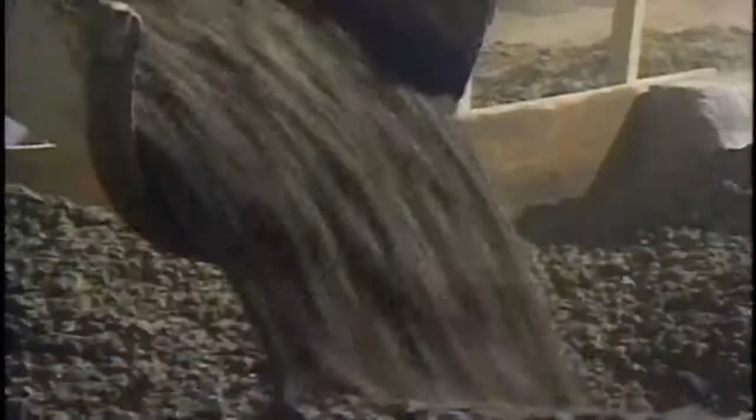Concrete. It's the most used building material on Earth. It was the building block of the Roman Empire. Today, it's the material for a new generation of gravity-defying skyscrapers. The raw ingredients that create this magic formula can be found in nearly every country on Earth.

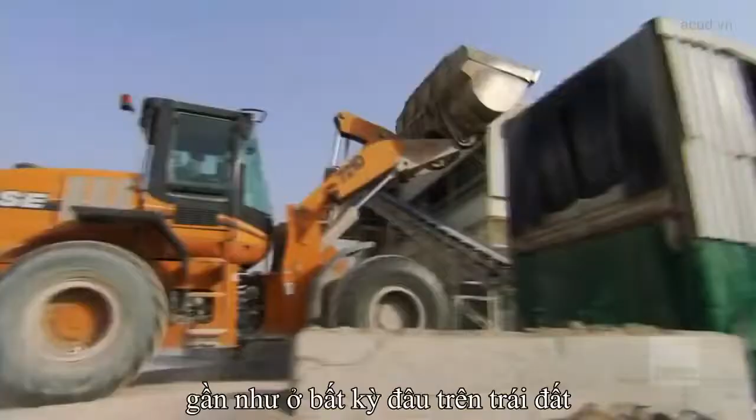Yet how these simple components are mixed together can make the difference between tragedy and triumph. From the mundane to the massive. From the ordinary to the extraordinary. Concrete helped pave the way for innovation and laid the foundation for the world's greatest civilizations. Now, go inside the science of concrete.

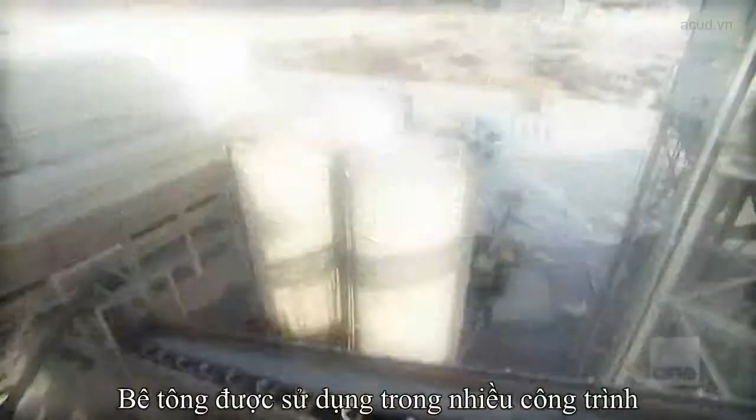It starts out like liquid. When it dries, it becomes stone hard. This amazing metamorphosis has earned concrete the nickname liquid rock. It has served as a cornerstone of engineering for centuries. And it's a highly prized tool of construction for a reason.

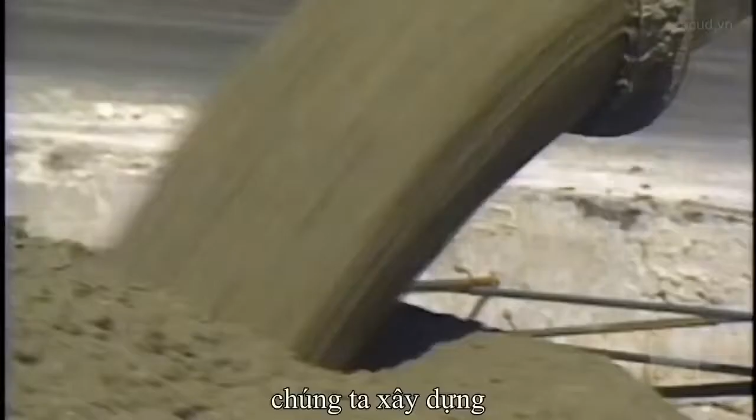It's easy to take concrete for granted. People see it in sidewalks and roads all the time, every day. But in fact, it is the closest thing to a miraculous material in construction that we've ever had. Concrete is everywhere. It has an almost unlimited engineering potential. It can take on nearly any shape and forms the backbone of a variety of the world's construction.

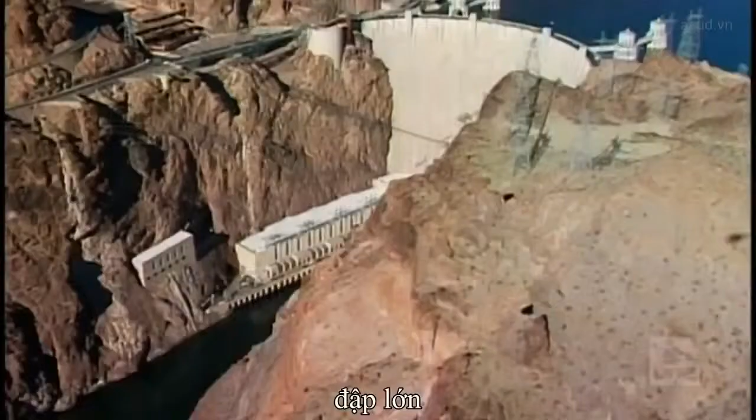Superhighways, massive bridges, man-made waterways, mega dams, the world's tallest skyscrapers. This miracle material begs the question, how does it do it all? I worked on a lot of jobs, and basically they all have a different formula for their concrete. Now I can't imagine the world without concrete.

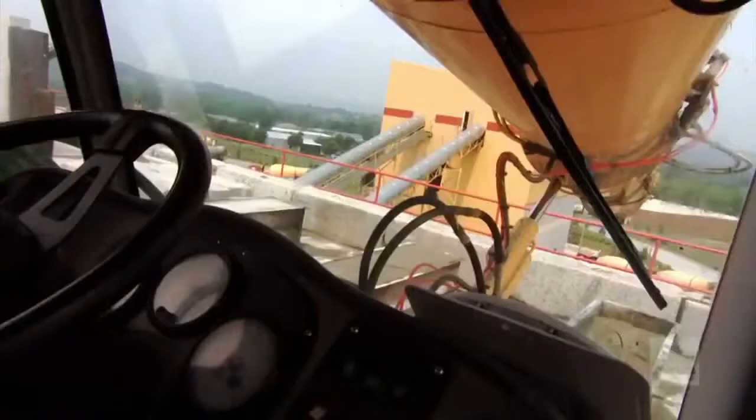The basic formula for concrete is simple. Sand, crushed rock, called aggregate, water, and the heart of the concrete mix, cement. Cement, it is the grey, powdery material that acts as a glue that sticks all of the concrete together. It covers and coats all of the gravel, the sand, and the rock as a way of gluing and binding the whole material together.

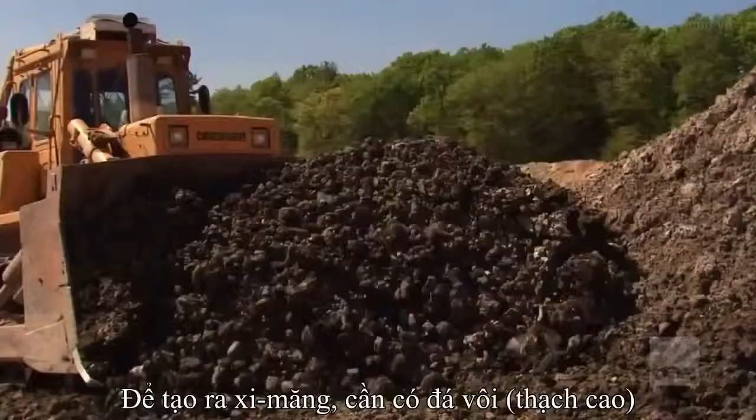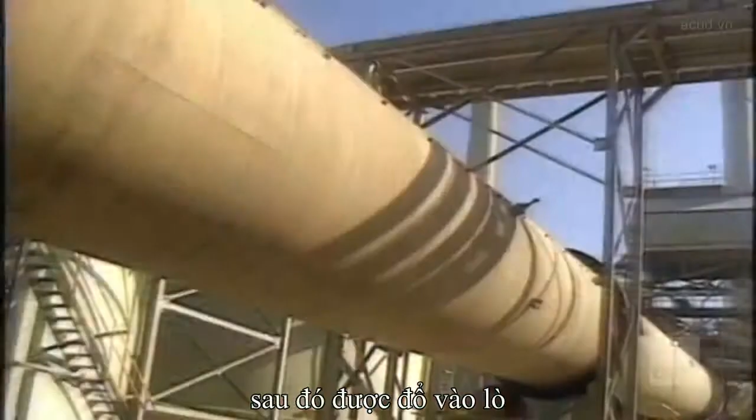To make cement, you need limestone, clay, and other elements like iron. These ingredients are crushed and combined into a powder that's poured into a kiln. The massive cylindrical spinning kilns heat the mixture to a temperature as high as 2,700 degrees Fahrenheit. The mixture becomes partially molten, forming a new marble-sized component called clinker. Once cooled, machines grind clinker into a superfine powder we know as cement.

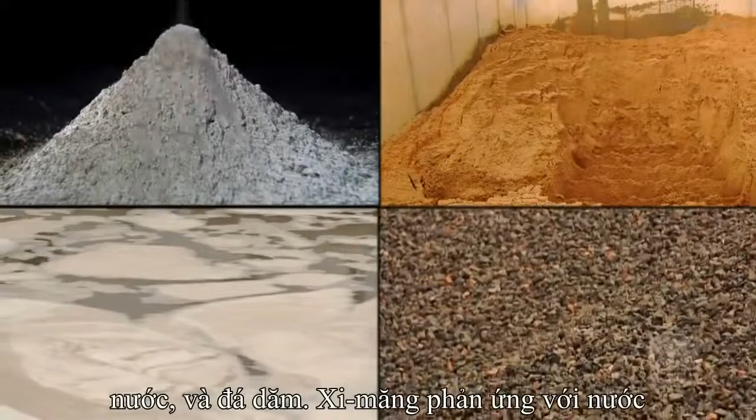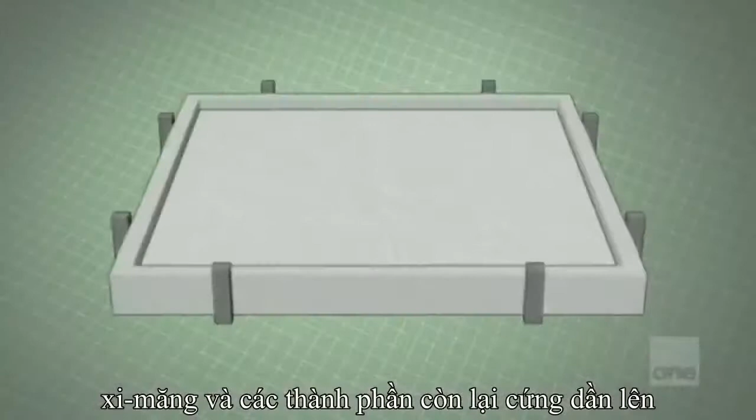Cement binds the ingredients together. When added to sand, water, and crushed rock, the cement reacts, linking the raw elements into one powerful whole. Water is the key. When cement reacts to the water, it undergoes a transformation called hydration. During this reaction, a node forms on the surface of each cement particle. The node grows and expands, linking up with other nodes. It sticks to the crushed rock and sand in the mix. Cement binds these ingredients. As it solidifies, concrete becomes a building block of modern construction.

The water actually allows a chemical reaction in the cement to allow it to harden. People often think that concrete hardens by drying. It actually hardens by hydrating, or getting more wet. The water in the cement mixes with a lot of the minerals and chemicals that are in the cement, and by that mixture forms a new compound which then hardens. This basic process hasn't changed in over a century.

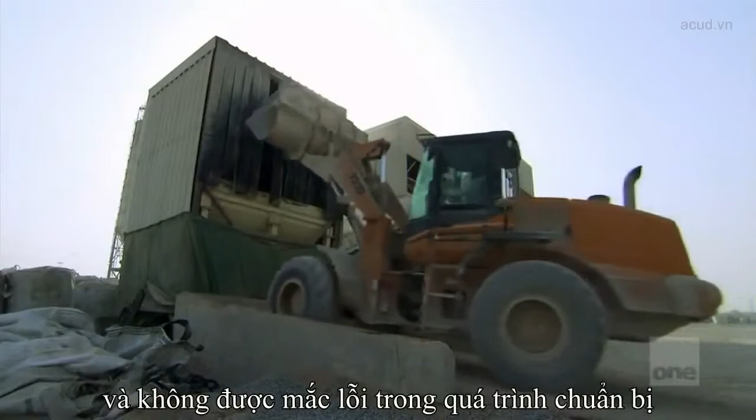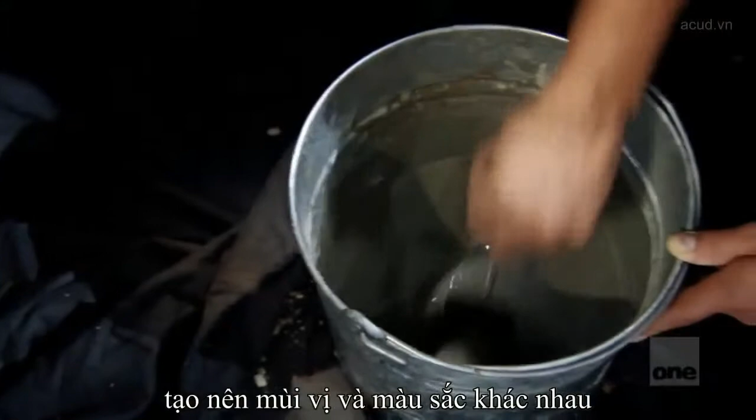But creating concrete is no simple matter. Making the right recipe requires precision and flawless preparation. It is a synergy of ingredients and timing. In a way, making concrete is like making a cake. There are lots of different recipes to make a cake. You get different flavors, different colors, different textures, but there are also lots of ways that you can make a cake wrong. It's not going to set properly, or it can come out in a way that's very different from your intentions. Getting the recipe right is everything, and the consequences of a flawed mix can be deadly.

The residents of Mexico City learned this the hard way. On September 19th, 1985, the Mexican capital is rocked by an 8.1 magnitude earthquake. It causes up to $5 billion in damages. Investigation of the rubble reveals that many of the buildings had been made of a substandard concrete.

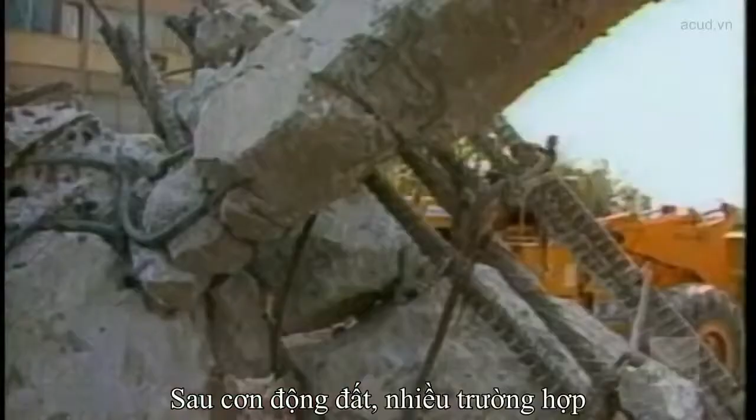Yes, we saw examples after the Mexican earthquake where when you use inferior concrete and you skimp on the rebar, and we saw both extensively in Mexico City, the concrete doesn't have its expected strength. The result is walls would fracture and shear and the building would collapse, when the expectation would have been that the building should have easily survived to preserve health and safety. The consequences of this quake are tragic. An estimated 10,000 die. Another 50,000 are injured.

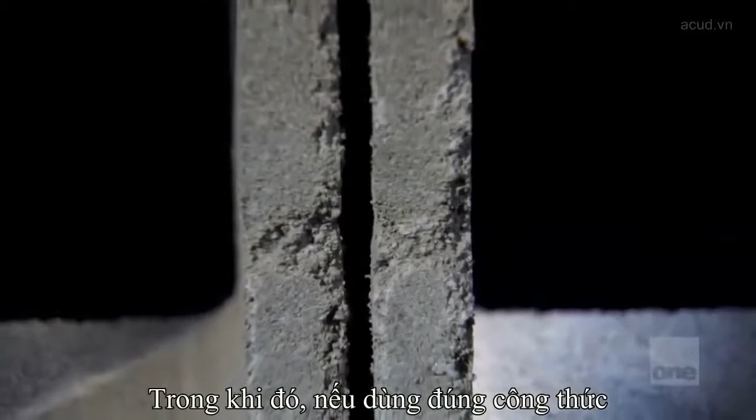But with the right formula, structures made of concrete can endure thousands of years. The ingredients for concrete have stayed the same for centuries. But there has always been room for innovation. With special ingredients and slight adjustments to the formula, concrete can adapt to the challenge of a specific project.

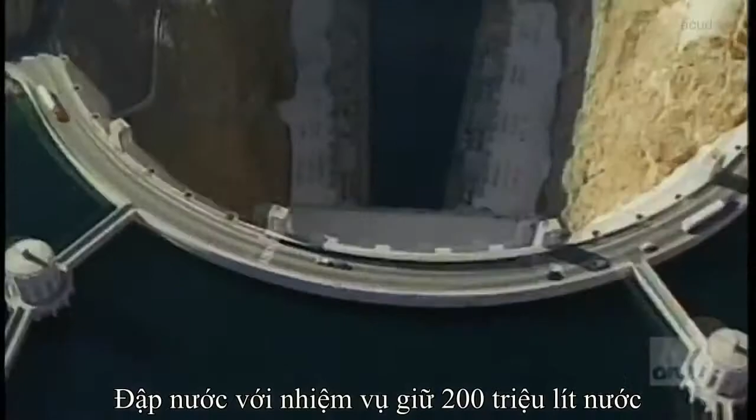Want a dam to hold back 52 million gallons of water? Add less aggregate to the formula to create a concrete with greater density. Want to create the foundation of an epic skyscraper? Add less water for a faster drying mixture. The array of different recipes is virtually infinite.

The hunt for the right formula for a specific project is nothing new. The search for the strongest and most durable recipe goes back thousands of years. Although other civilizations, including the Egyptians, experiment with concrete, the Romans transform it from a supporting material to a main substance. In Rome, liquid rock fuels the dreams of an empire.

The word concrete even originates in Rome. From the Latin concretus, it means grown together or compounded. Roman concrete contains the traditional ingredients of sand, water, and crushed rock. But volcanic ash from the hills of Pozzuoli, Italy, transforms the material.

The Romans were very astute architects and engineers, and they recognized that by mixing volcanic ash from Lake Pozzuoli in Italy, they were able to get a concrete that became very hard. This volcanic ash proves to be an adhesive binding agent. It gives ancient Rome a powerfully strong concrete.

This innovation allows the Romans to craft an empire from the ground up. Concrete becomes the backbone of a dizzying array of structures, aqueducts, bathhouses, and markets. But today, one structure alone stands as a unique testament to the power of ancient Roman concrete: the Pantheon.

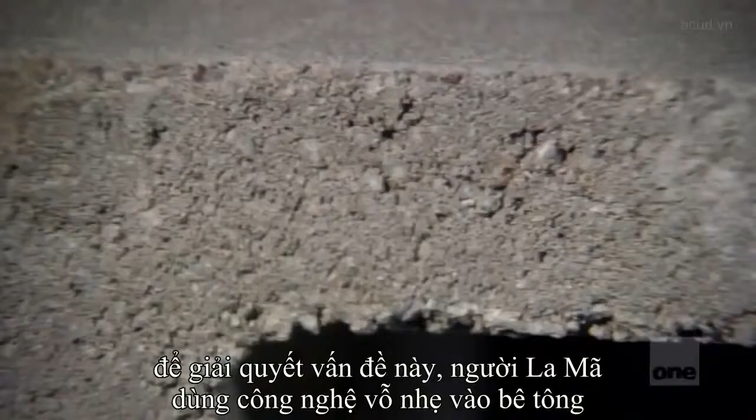It is the Romans' ability to modify the formula for each stage of the dome's construction that allows it to stand to this day. The Romans also faced an immense engineering challenge: air bubbles. Pockets of air can form in the concrete during a pour. When the water dissipates, these holes can lead to cracking. To solve this problem, the Romans tamped or tapped the concrete, avoiding the need for excess water. By removing the air bubbles, the Romans increased the dome's strength and stability.

The Romans also wanted to reduce the overall stress on the dome. To do this, they created sunken panels called coffers. These panels are decorative, but also take weight off the dome. They are a synergy of architecture and engineering.

However, there is one feature that stands out in the Pantheon's design. The dome's interior was designed to look like the Roman heavens. It features an interior circle called an oculus, or great eye, representing the sun. 27 feet across, the oculus is the source of all light for the Pantheon.

The oculus reduces the amount of weight and stress at the center of the dome, giving the whole structure added durability and strength. It is an engineering marvel. The dome of the Pantheon is a stunning example of how Roman concrete could be built to last.

Each layer of the dome becomes less dense the closer it gets to the top. At its weakest point, the Romans designed an oculus which reduced weight and stress. These innovations continue to impress engineers almost 2,000 years later. For 1,500 years, that was the largest dome ever built by man. There aren't many engineered structures that stand that kind of record of time.

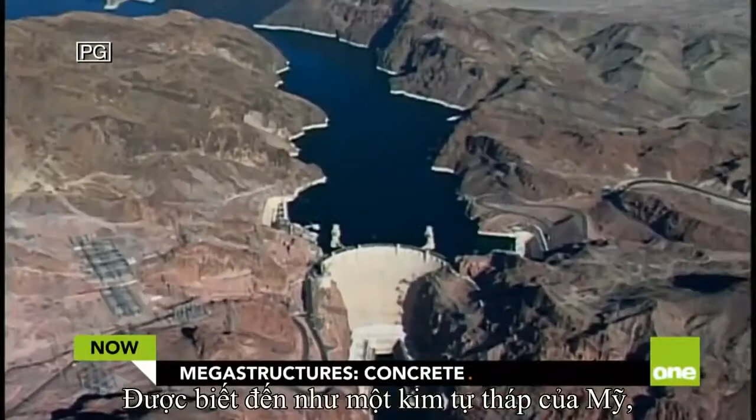It has been called an American pyramid. The mighty Hoover Dam is a testament to the power of concrete. Weighing 6,600,000 tons, this concrete colossus holds back 45,000 pounds of water per square foot. The force of this water generates hydroelectric power for over 1 million people.

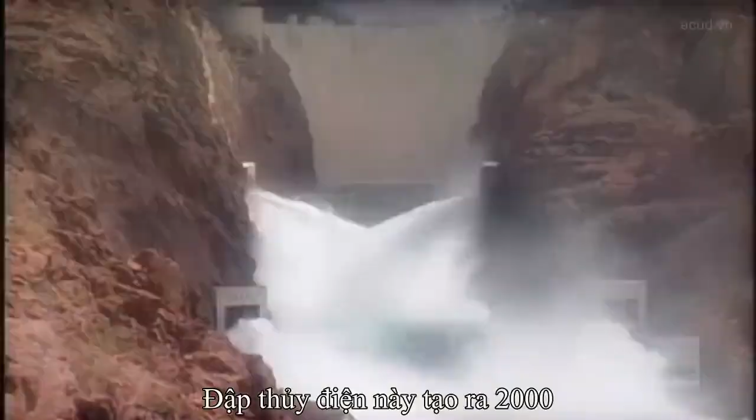From the neon lights of Las Vegas to the freeways of Los Angeles, this hydroelectric dam generates 2,080 megawatts of electricity. The Hoover Dam's construction redefined what the world could do with concrete, but it also rerouted one of America's greatest rivers, flooding ancient canyons, reshaping the area's natural habitat.

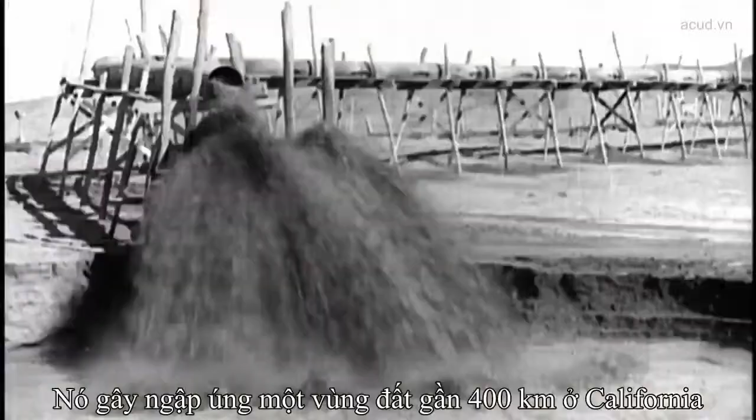In 1905, the Colorado River breaks free of a man-made canal. It floods Lower California across 150 square miles. Epic floods wipe out thousands of farmers. Millions of dollars are lost. The Colorado is unpredictable.

The Southwest also has another problem: power. The boom towns of Los Angeles and Phoenix are growing at a rapid rate and desperately need energy. Raging floods and lack of power. Two different problems. But engineers believe there is one answer to both: dam the Colorado River.

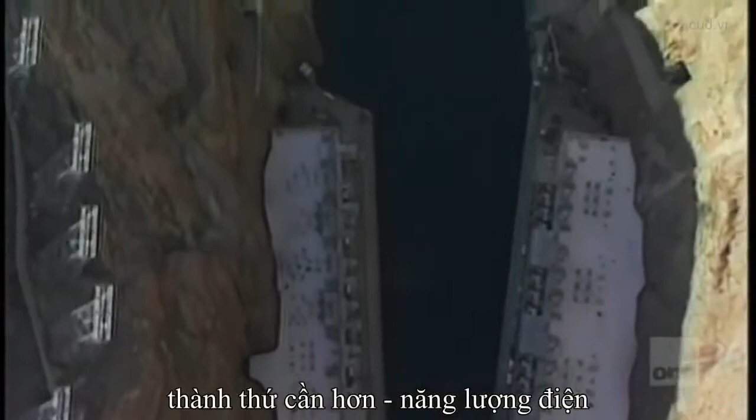A hydroelectric plant would harness the natural power of the Colorado and, using simple mechanics, convert that energy into much-needed electricity. You're generally looking in the construction of a dam for a huge, solid structure. It's really about holding back enormous quantities of water.

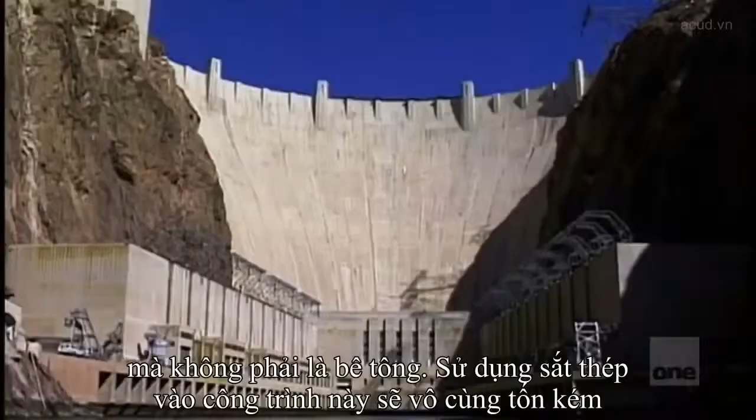The dam needs a material that is strong enough to hold back the raging Colorado. And since the location would be remote, able to be made on site. One material can meet all of those requirements. It's hard to imagine the Hoover Dam being built out of any material other than concrete. Using steel on this scale would be too costly. But to make the Hoover Dam, engineers would need more concrete than had ever been used before in one project.

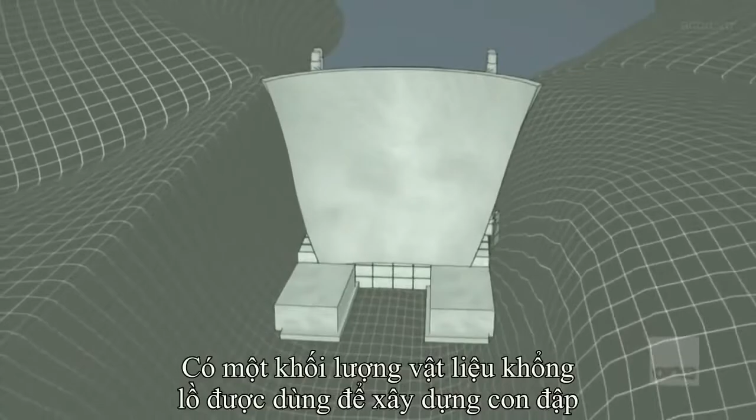The dam will be 726 feet high and 1,244 feet wide. With a structure this big, it will be impossible to do one massive pour of concrete. The amount of material that went into this dam was so enormous that there's no way to pour the concrete in one segment. So what they did is they divided the whole dam into lifts and then into individual blocks.

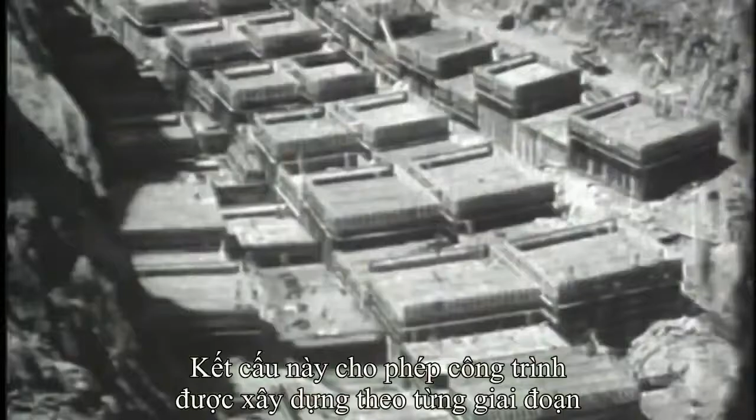The Hoover Dam needs to be built as a series of individual blocks that will interconnect. Trapezoidal in shape, the blocks rise in 5-foot lifts. This crucial engineering element allows the project to progress in stages. Something on that scale being built in concrete had not been built before.

Hundreds of pounds per square inch, thousands of pounds per square foot on the base of the dam, trying to push the dam downriver. And now you've got the Hoover Dam to stand this incredible water pressure trying to push it down the river. Chief Engineer Frank Crowe knows the completed dam will have to hold back 45,000 pounds per square foot of water. For this, they need a special high-strength formula.

Crowe's solution? A minor but crucial modification to the standard concrete formula. A very dry mix, one that uses less water. More water makes it more workable, but shrinks more, and shrinkage causes cracks. The less water, down to 7%, the better and stronger the concrete.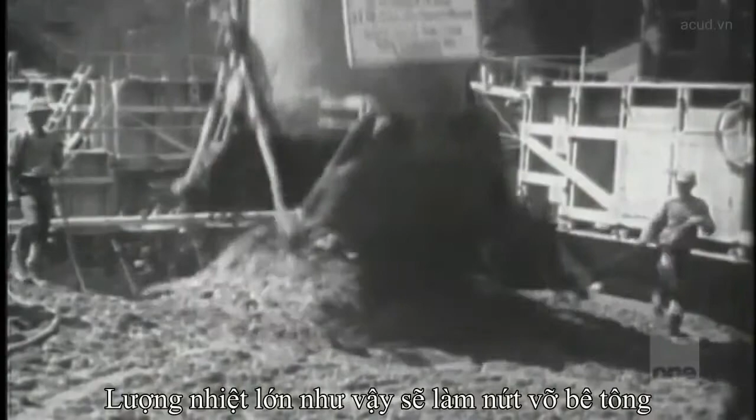As the amount of concrete going through this chemical reaction gets bigger and bigger, the amount of heat that's given off gets bigger and bigger. Engineers calculate that if the dam were built in one continuous pour, the concrete would get so hot that it would take 125 years for it to cool to normal temperatures. The extreme heat would also cause the concrete to crack and crumble away.

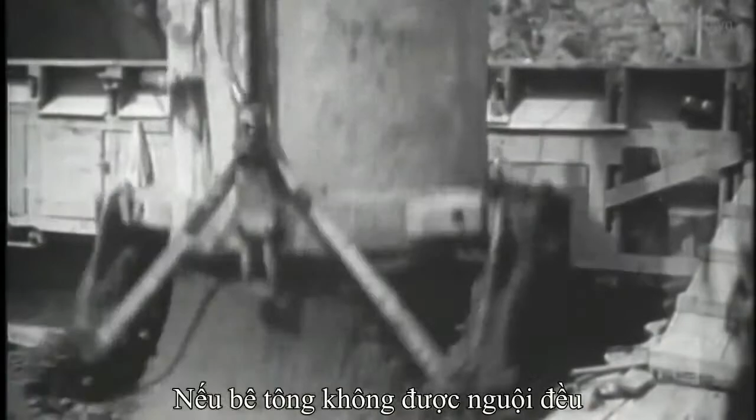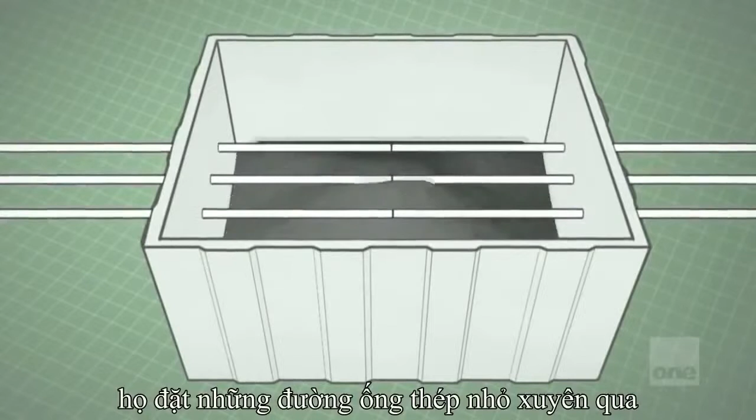Concrete dries from the outside in. If the concrete is not evenly cooled, it can crack, putting the stability of the whole structure at risk. Instead, Frank Crowe and his team of engineers have an innovative solution. Each block is outfitted with coils of thin-walled steel pipe. When the concrete is first poured, water from the Colorado River circulates through these pipes.

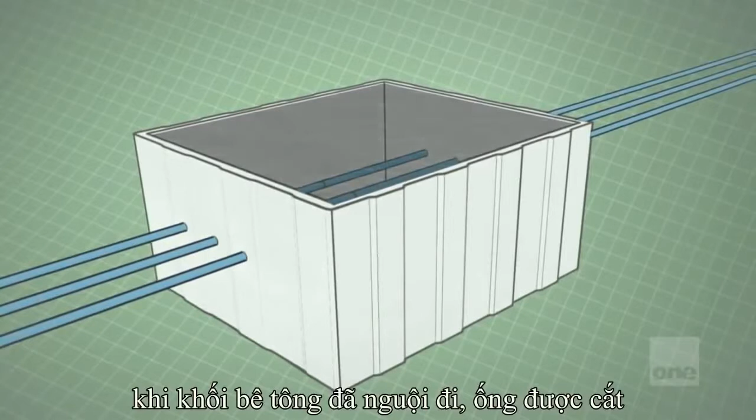The idea is to initiate a cooling process, but one done in stages. Cooling the concrete too quickly will cause it to crack. After the concrete has received its initial cooling, chilled water from a refrigeration plant is circulated through the coils to finish the cooling process. As each block is cooled, the pipes are cut off, and they are filled with grout by pneumatic grout guns, pumping 300 pounds per square inch of filler.

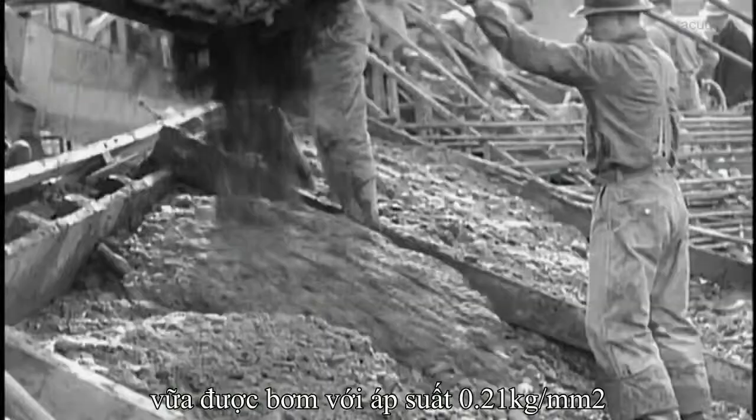Once the individual blocks have cooled and set, there is one final challenge. In order to prevent the hairline fissures between the blocks from weakening the dam, the individual blocks are formed with vertical interlocking grooves. When the concrete has cooled, grout is forced into these joints, bonding the entire structure into a monolithic concrete giant. This method takes advantage of one of concrete's fundamental properties. Concrete as a material is very strong in compression.

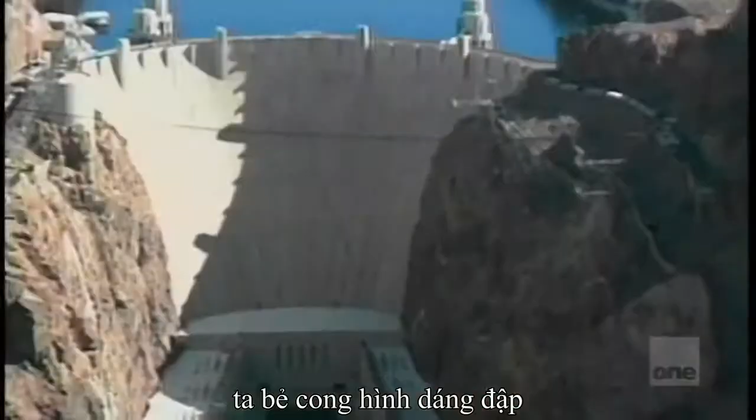To build a structure, to make sure that the concrete is all in compression, you bend the dam like this, so now the water pushes on an arch. Well, what's the water trying to do? It's trying to push that through. Well, it's the Pantheon Dome again. Only this time it's the water trying to do it. It's trying to push the dome through the river gorge. What that does is put the whole structure in compression. Well, concrete loves compression. The more it is forced together while setting, the stronger concrete becomes. As a result of this property, the Hoover Dam is arguably stronger today than it was on opening day, 70 years ago.

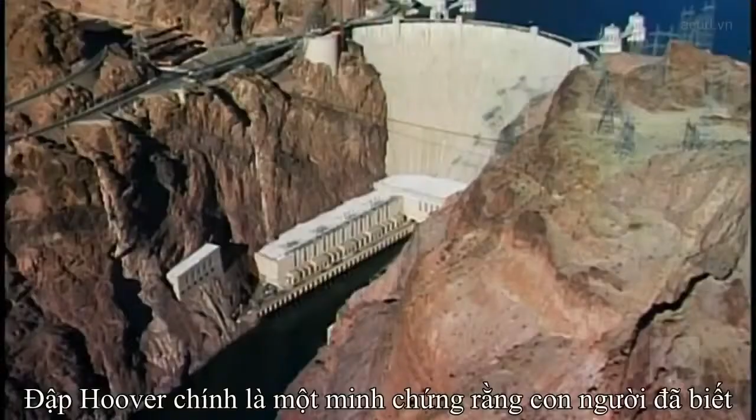The Hoover Dam is a testament to engineering know-how and a skillful use of concrete. The dam contains enough concrete to pave a strip 16 feet wide and 8 inches thick from San Francisco to New York. More than 5 million barrels of cement were used in the Hoover Dam, and a total of 21,000 men worked on its construction. And it represented an enormous engineering achievement to build successfully. It took the lives of over 100 men to build that dam.

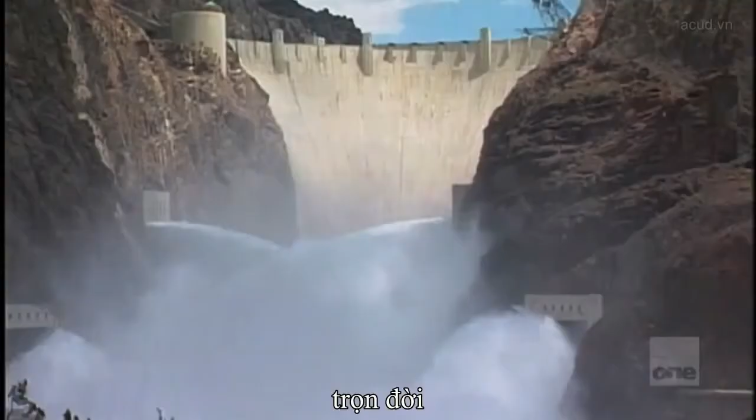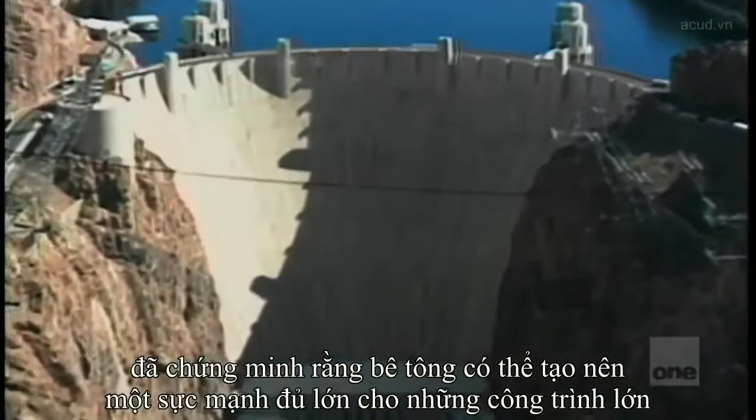Today, the concrete mega dam is nothing new. But Hoover set the stage and showed the world that concrete could do the job and help generate much needed power. It changed the course of one of America's wildest rivers. Now the question is, can concrete conquer the skies? Now go back inside the science of concrete.

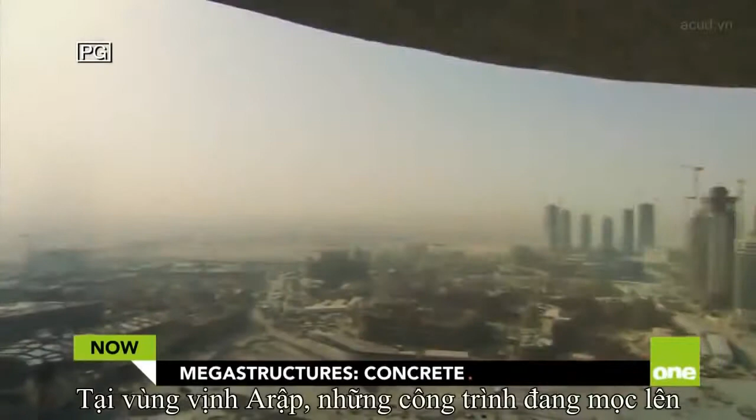In the scorching Persian Gulf, a growing structure cuts the horizon. Its expected height is a closely guarded secret, but experts around the world agree the Burj Dubai may be the world's tallest skyscraper. It'll be the tallest building, for sure, the overall title holder for some time to come. A construction project this massive needs 11 cranes and the world's fastest high-capacity construction elevators. The building rises at the breakneck pace of 1 floor every 3 days.

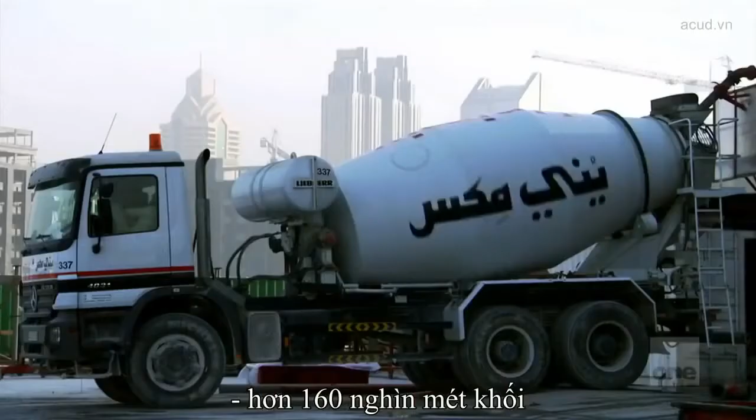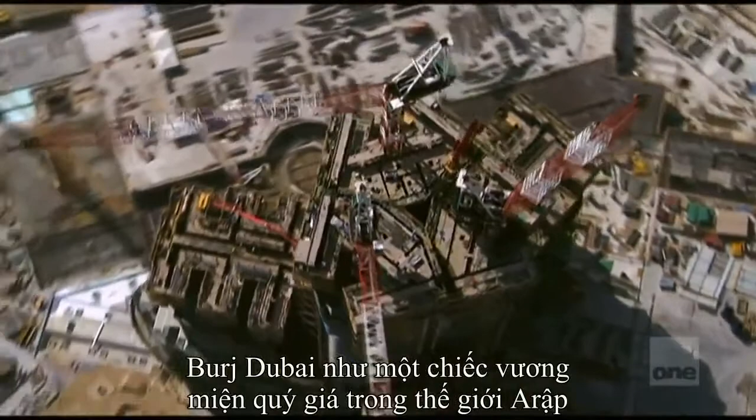And from the walls to the floors, to the columns to the stairs, much of this desert skyscraper is concrete. More than 160,000 cubic meters of it. At more than 2,000 feet, the Burj Dubai will be the crown jewel of the United Arab Emirates and is a shining example of a new generation of skyscrapers that seek to dominate the skies. It is a far cry from the humble beginnings of the concrete skyscraper, more than a century ago.

At the beginning of the 20th century, the building material of choice was not concrete, but steel. You can build a hell of a skyscraper with steel. In fact, the Empire State Building is so overbuilt, you could probably add another 30 stories to it under today's building codes, and it would still comply fine. So steel was a great material. You can build a great building from steel, but it's an expensive way to go.

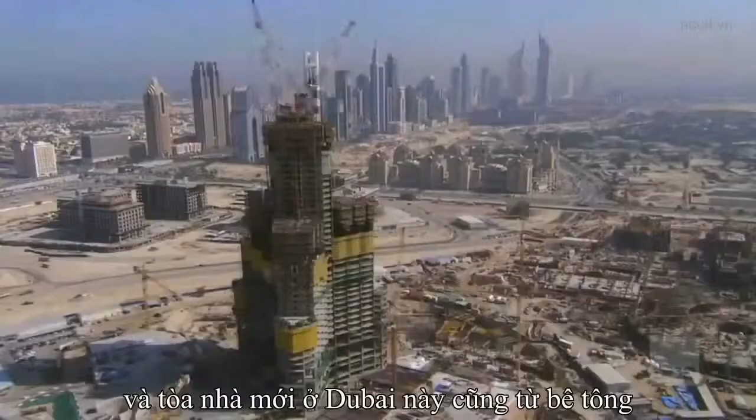And steel is not only costly, but represents a challenge for a new generation of skyscrapers that grow increasingly higher. And if you're going to go tall, the building's got to be stiff. It is so much easier to make those thick, stiff walls from reinforced concrete than steel that it's a no-brainer. The Petronas towers in Malaysia are concrete, and this new one in Dubai is going to be concrete. If you're going to go that high, it's going to be concrete.

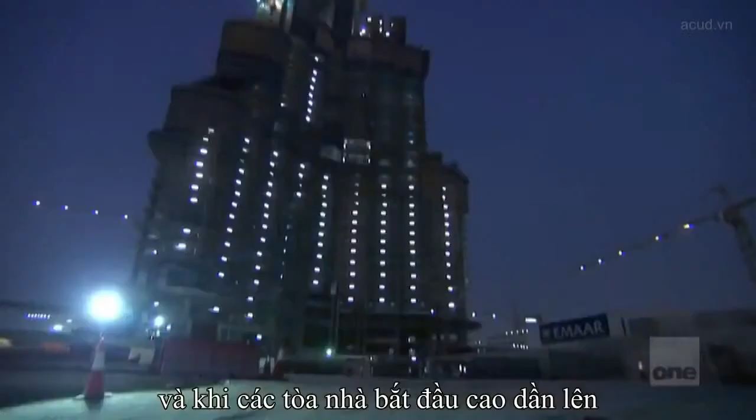The stiffness of concrete, combined with its availability and relatively low cost, have made it the building material of choice for these new skyscrapers. As our experience and comfort level with reinforced concrete came along, and as the buildings started getting taller, reinforced concrete really became the material of choice.

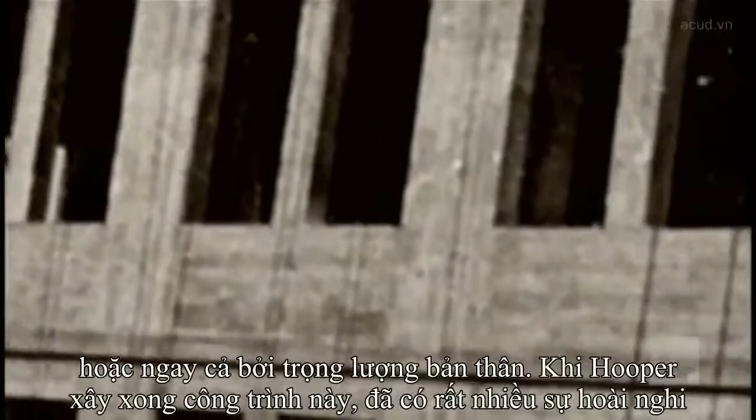Before 1902, the tallest steel reinforced concrete building is a paltry 6 stories tall. The Ingalls building in Cincinnati changes that. Engineer Henry Hooper dreams of a monolithic building of concrete, a skyscraper 16 stories tall. But many engineers believe that a concrete tower 16 stories high will collapse under strong winds or even its own weight. When Hooper finishes his building, there are many skeptics.

There's one anecdote that says that a reporter actually stayed up all night waiting for the Ingalls building to collapse because he was so certain that it was going to. Needless to say, the reporter was disappointed in the end. It is a towering success for its time. But at 210 feet, it is just one in a dizzying array of modern-day skyscrapers. More than a century later, the towering dream of Dubai aims to be over 10 times the size of the Ingalls building.

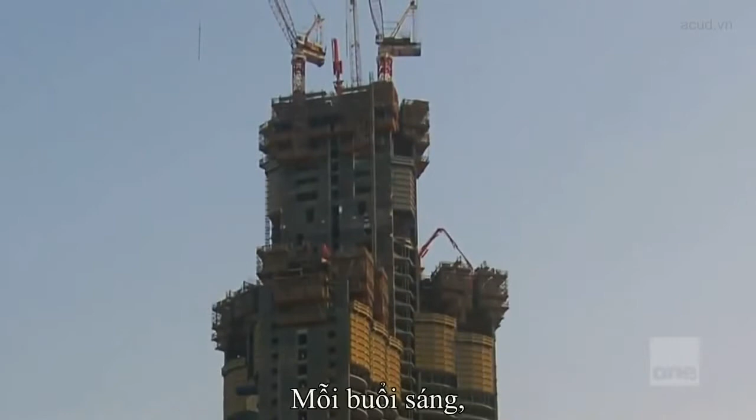Every morning, workers assemble in the garage of the building. Erecting this much concrete in the punishing heat of the Gulf requires serious manpower. But before workers can pour a drop, the perfect formula needs to be mixed at the batch plant. The first problem this leviathan from the desert faces is its own height. The taller a building, the more it flexes, increasing the likelihood that it could flex to the breaking point, a deadly proposition. Older skyscrapers like the Empire State are safe because they use massive steel beams and braces. But erecting a tower nearly twice as high requires a material with even greater shock-absorbing qualities.

If you take something like the Empire State Building and the wind blows on the Empire State Building, well, the wind creates pressure, which are going to try and bend the Empire State Building over. But as you go higher, imagine now going twice the height of the Empire State Building. The wind gets more surface to work on. Indeed, buildings collapse when the flex is so great that the weight of the building gets outside of its footprint and the building doesn't have strength enough to handle that. Down it comes.

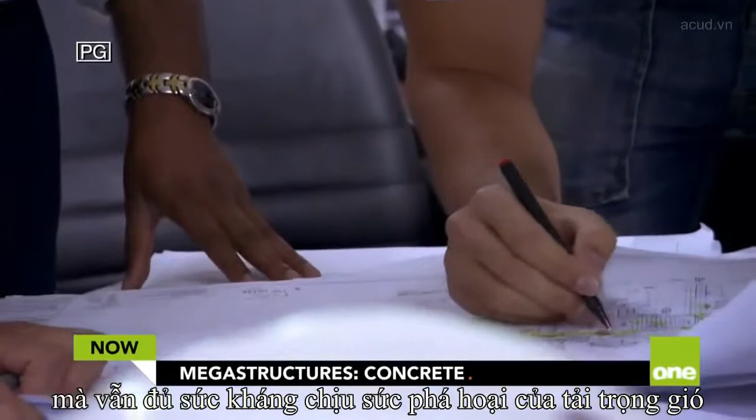Now go back inside the science of concrete. Builders will need a formula that is almost as strong as cast iron, yet more resistant to damage due to vibrations from the wind. After extensive computer and wind tunnel testing, the architects behind the Burj Dubai will use a high-strength concrete formula. It contains slag, a byproduct of the steel industry, and microsilica, which gives the concrete added strength. If you look at the microstructure of concrete, there are many, many spaces between the particles that are either hollow, so we call them pores, or they are filled with water. Microsilica plays the role of filling these pore spaces, and therefore it makes concrete much more dense, more durable, and stronger.

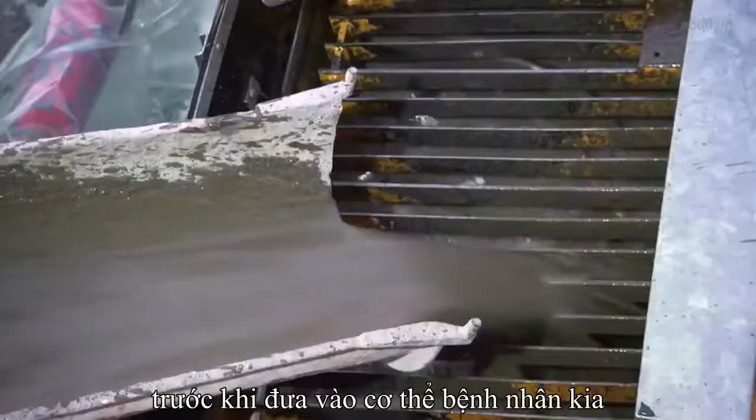And in order to make sure that the formula is consistent, Alam Feroz, quality control manager for the concrete of the Burj Dubai, routinely tests the concrete before it is used in the skyscraper. I'll give you an example. It's like if you're giving blood to a patient, so how important is the blood to be tested before you give it to the patient? It's a big risk. So same is with the concrete. When it has been tested, I get confident that whatever I'm giving to the structure, it's been tested and it complies to the requirements. It won't be just a mere guess.

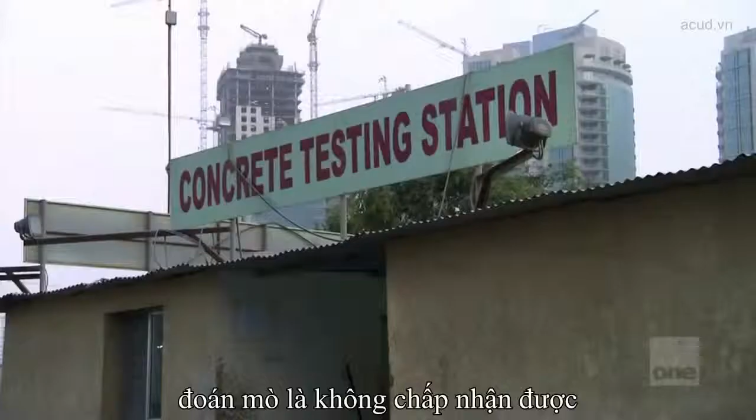To test the strength of the concrete, small cubes are hardened in cool water. Next, the concrete is deposited into a crusher for a stress test. This cube holds up to nearly 14,000 pounds per square inch, making it a high-strength concrete. The concrete test has been successful. But as strong as this formula is, it still has to contend with desert heat.

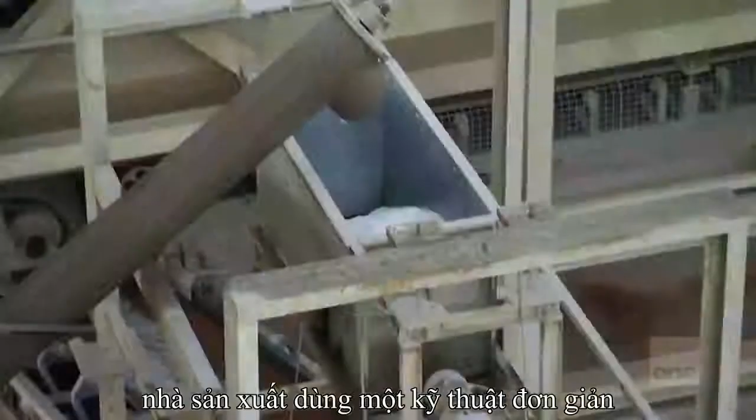Temperatures top 120 degrees. How do you keep concrete cool in the desert? Builders use a deceptively simple technique: shaved ice. While it's being mixed at the batch plant, slices of ice are mixed into the concrete so that it remains cool inside of the mix trucks. When it arrives at the building site, the melted ice has kept the concrete from overheating.

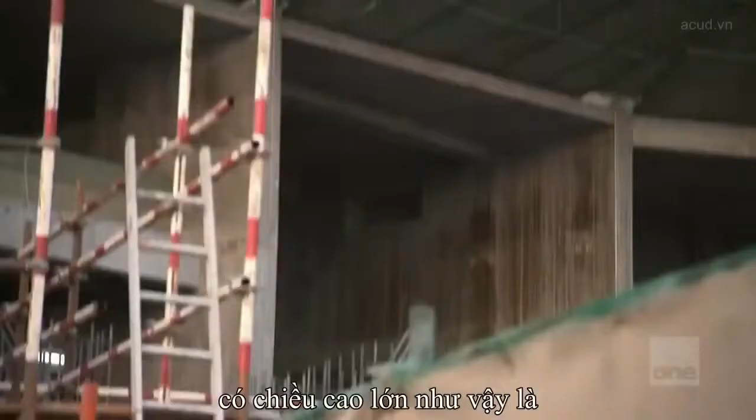But now, the concrete has to travel hundreds of feet into the air. The key technical problem for building a building of this size and of this height is going to be to vertically pump concrete of the order of 2,000 feet high. It takes huge amounts of pressure. Mixer trucks deliver the mix to the pumps. The building requires 3 pumping stations where the liquid concrete is poured. The high-pressure pumps force the concrete through a complex system of pipes.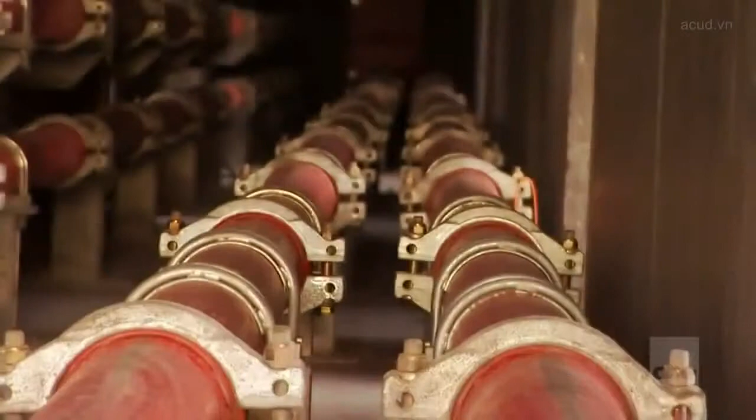Now, the technology to do so is awesome. If you think in terms of water, you have 1,000 feet of hydraulic water pressure. That's a tremendous kind of pressure. Now, concrete weighs 2.5 times as much as water. So you need a piping system that's so much stronger, and also pumps that are so much more efficient to pump concrete up that high.

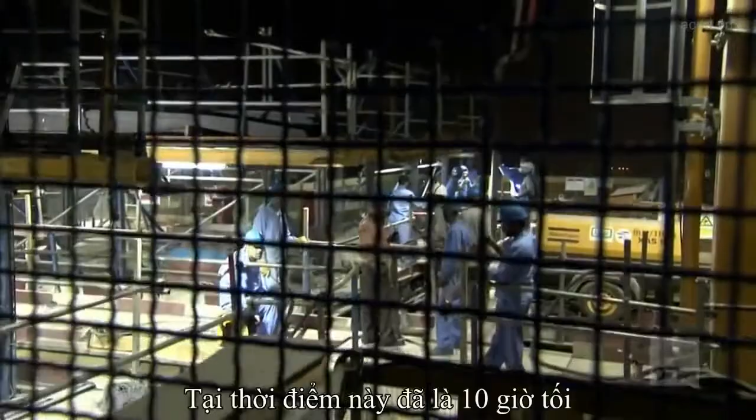As the sun sets, the second shift workers return to feed this growing skyscraper. The concrete pour takes place at night so that the concrete can harden evenly. At the moment, even though it's 10 o'clock at night, it's about 100 degrees Fahrenheit, and the humidity is about 90%. The advantage of pouring concrete in these conditions, because the humidity is so high, we don't have a problem with it drying out the top surface of the concrete, but we've got effectively another roughly 130 stories to go.

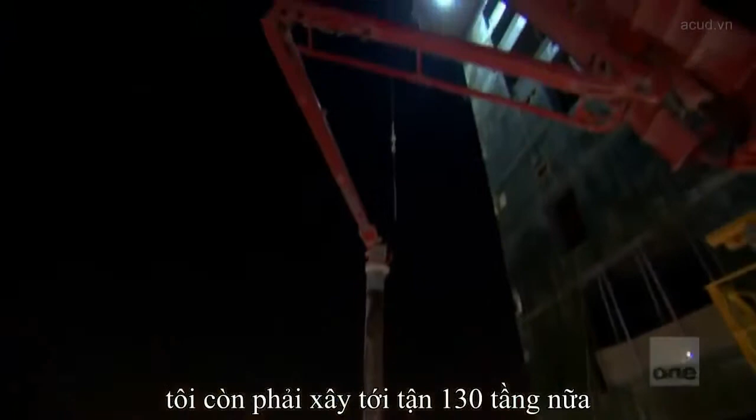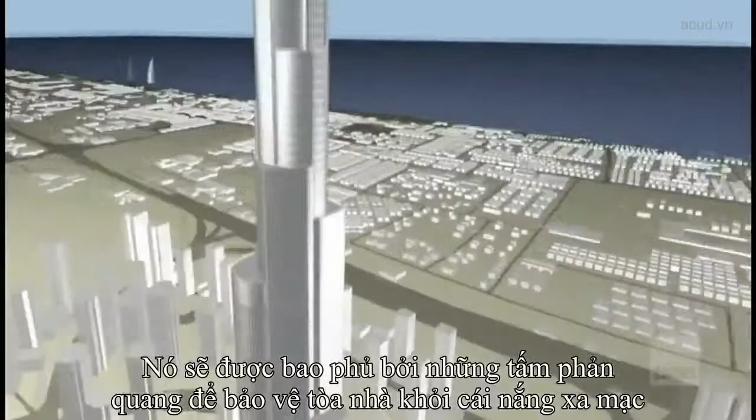As the pour continues into the night, the Burj Dubai has reached a milestone. 25% of the building is done. When completed, this megastructure will stand over 2,000 feet tall, making it twice as high as the Empire State. It will be covered in a reflective glaze to protect it from the extreme heat and high winds of the Gulf. But the building's guts are solidly concrete. When it's finished in 2008, the Burj Dubai will be the tallest building in the world.

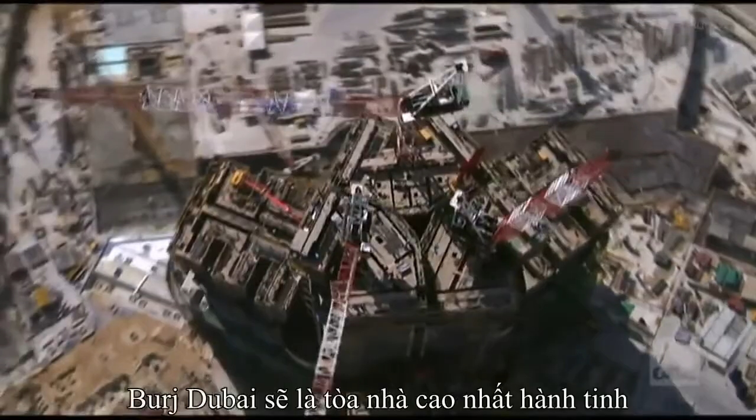Like the Ingalls, the Burj Dubai has set the standard for its day, showing once again that concrete can be used in a variety of ways for the world's tallest buildings. Now, reinforced concrete is establishing itself as a building material of choice for skyscrapers. Concrete has conquered the skies. Concrete's next quest: how to tackle the building challenges of the future. Now, go back inside the science of concrete.

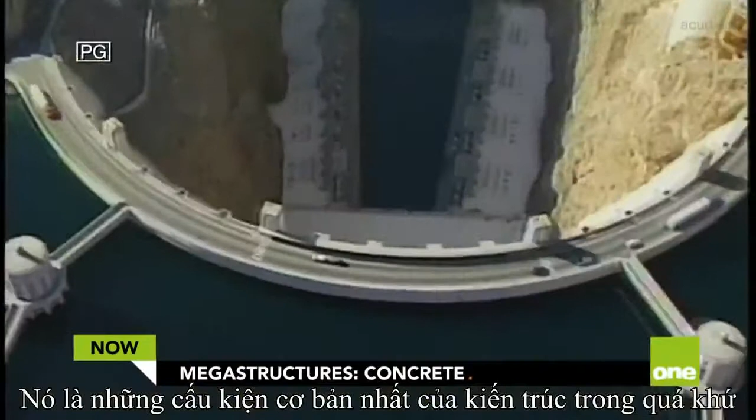Concrete has been a key ingredient in the construction of our civilization. It has been a fundamental part of our architectural past and is now paving the road for our future. Scientists are developing new formulas for concrete and are looking for ways to make it stronger, more environmentally friendly, and capable of doing things we never thought possible. Back where it all started, at the heart of the Roman Empire, concrete has taken a new and exciting turn.

Just a few miles from the Pantheon, the Jubilee Church, designed by architect Richard Meier, uses a new form of concrete. The church was commissioned by the Archdiocese of Rome to commemorate 2,000 years of Christianity. For that, the building would need a material that was both ancient and modern, a material that would speak to the church's past and make a bold statement for the future. They would also need a material that would last the test of time. Concrete fits the bill.

This church is remarkable for several reasons. It has these three sail-like forms, loosely representing the Holy Trinity, but made in effect of giant concrete blocks. The shells of the church, which stretch out and up in the same way as the Sydney Opera House, are made of 346 white, reinforced, precast concrete blocks.

Concrete, for all of its advantages, does tend to pick up discolorations from the atmosphere and so on. Meier, though, wanting to keep his building white, managed to work with local firms in order to achieve this concrete mix that included these photocatalytic particles that will absorb and neutralize the acids in the air. And in effect, what you'll have is a pollution-eating building. Italcementi came up with a revolutionary new formula for the concrete that will keep it as pristine in 50 years as it was on opening day.

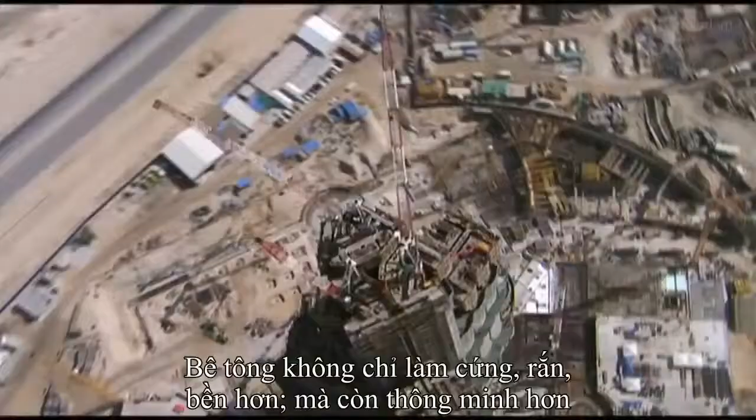Concrete isn't just working harder, it's working smarter. New developments in concrete technology now allow for what used to be unthinkable: helping the environment by using an unusual aggregate: glass. The innovation here has been in making sure that the glass doesn't get corroded by the lime in the cement mixture. One of the biggest issues with concrete is that the Portland cement tends to be quite corrosive, and this has been a big problem with things like recycled glass.

It tends to corrode, the glass falls out. This composition of cement was actually developed by Columbia University. It is a much less corrosive, more benign cement, allowing you to put the glass chips in. So you can actually now have concrete with glass chips that actually has a good surface effect.

We are generating millions of tons of garbage, solid waste, and in New York City, approximately 6% of all solid waste is glass. That's bottles like this, yeah? And these bottles generally find their way into landfills. And that costs taxpayers hundreds of millions of dollars just to get rid of these bottles. Concrete's versatility allows it to bind with other materials, in this case, glass.

The first step is to separate the bottles by color. And then you crush them in a crusher. Now, crushed glass is not something like this. This is what we call broken glass, and that is something you want to handle very carefully. It has sharp edges, and that was also one of the problems we were facing, because skeptics asked, well, if you use glass in concrete, won't people cut their hands by handling the blocks or whatever?

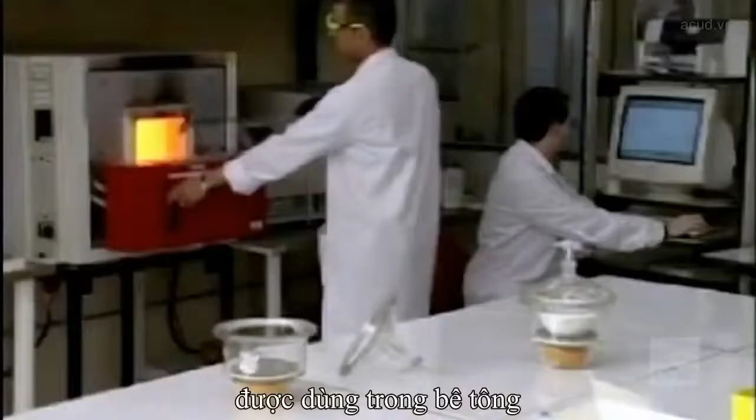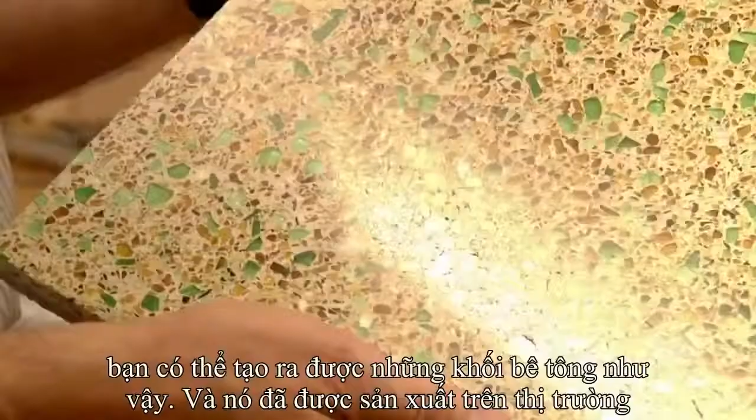These are actually 100% recycled glass pieces added into the concrete. Initially, scientists thought that recycled glass would make for a bad aggregate. But Professor Meyer and his team have found a way. Okay, so once you make concrete out of these glass particles and color coordinate that very well, then you can get something like this, and this is now already being commercially produced.

That's how regular concrete would look. And this is here our glass concrete, polished to a high precision, high grade of polishing. And that is known as terrazzo concrete. Using recycled glass as an aggregate is just one of the many ways that concrete continues to reinvent itself. It also may pave the future for a more environmentally friendly concrete.

There are also other developments reshaping concrete for the future. For the last 100 years, architects and builders have sought a way to allow light into concrete buildings, homes, and offices in a more efficient manner. One of concrete's biggest drawbacks is that it creates dark buildings that do not effectively conduct light. Experts are working to change this. Okay, this is a piece of light transmitting concrete. It seems like an odd concept, but what they've done here is to take standard concrete and add glass fibers.

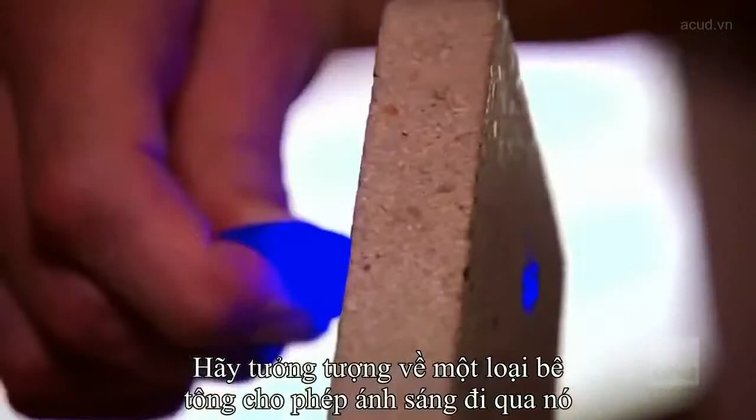Okay, so what you're seeing here is the blue LED passing through the glass fibers that are embedded in the concrete. Imagine concrete allowing light to pass right through it, or for someone to cast a shadow through a concrete block. The same thing can happen with normal daylight as well. So the idea is that you can build a structure with this concrete and allow daylight to actually come through the structural element of the concrete.

Light transmitting concrete, or LiTraCon, is a unique form of concrete that uses glass fibers to conduct light. It allows for massive structures to permit light to shine through. This technology has the potential to redefine what concrete looks like. Once considered cold and impersonal, these new forms of concrete are transforming the material.

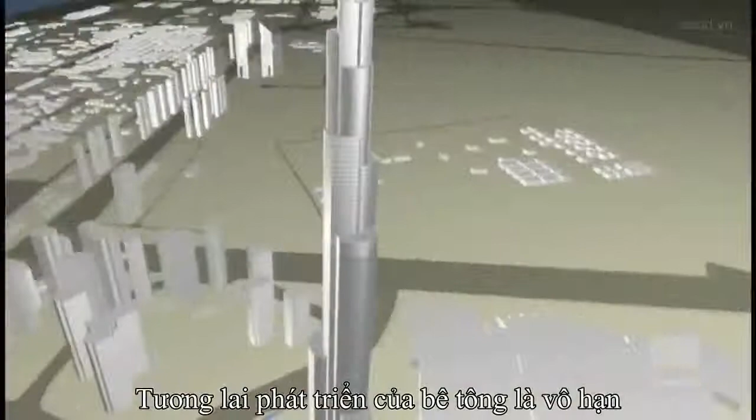What started off as the most basic of building materials is now on the cutting edge of building and design. The future for concrete is virtually limitless. If concrete is anything, it is a material that continuously reinvents itself. Concrete continues to adapt to the emerging challenges of our world and is laying the foundation for our future.